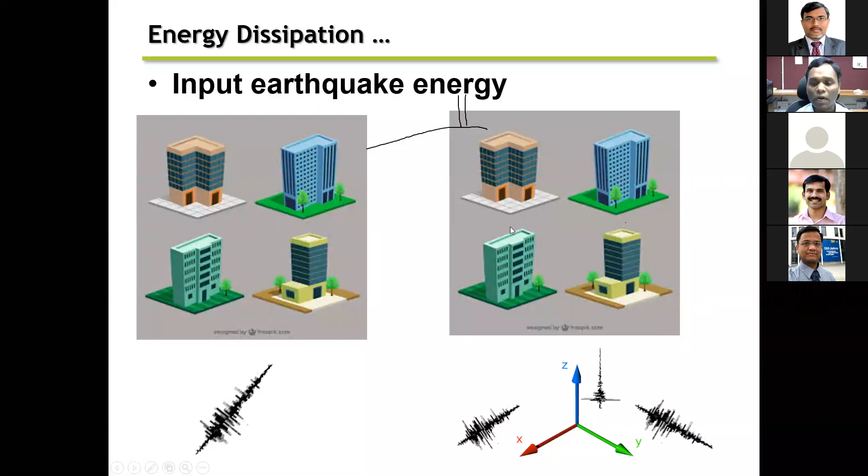Now, mostly the vertical earthquake component is smaller than the horizontal earthquake. So in many applications, the vertical earthquake effects are not considered, but there are some cases where you have to take the vertical earthquake component.

So let's say you have a building, and in one of the two orthogonal directions you have an earthquake acting at the base - let's say the X component. Again, it may be amplified or de-amplified based on site conditions. So when you have the earthquake ground accelerations, depending on the stiffness of the structure, it transmits from the base to the floor levels, or you can say the superstructure levels.

And you have your superstructures or floor levels where you have the mass - M1, M2, M3 are the masses. So at each floor level, again, these earthquake accelerations might be nearly similar to ground acceleration, might be smaller than that, but they won't be the same.

It all depends on the stiffness of the structure. Let's say at each floor level, some earthquake acceleration components act, A1, A2, A3. These accelerations times the corresponding mass create the forces, and we call these the equivalent lateral forces due to earthquakes. When these forces act at the floor levels, your structure deflects, and the deflection varies from the base to the free part, like delta 1, delta 2, delta 3.

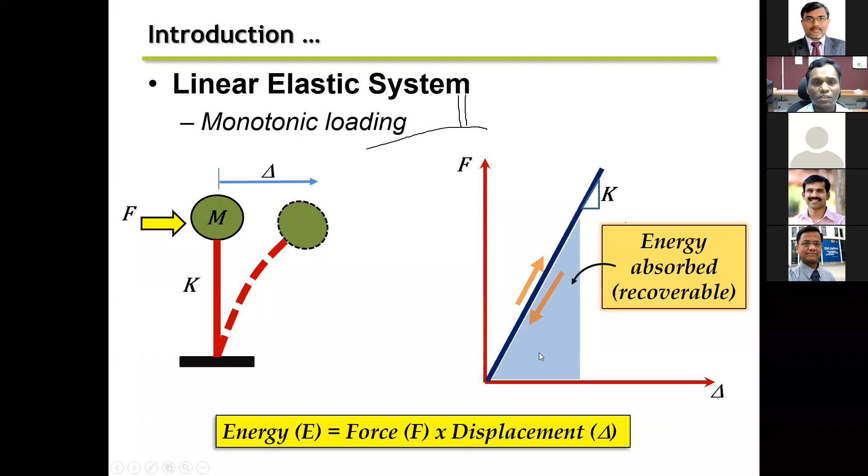Due to this force, at any force level I have a displacement, and if I take the area under this force-displacement curve, that gives me energy. But since when you release the force your displacement goes to zero, this energy is called the recoverable energy or elastic energy. Mostly you use this, it's called the strain energy, in many applications.

Now if I go to a slightly inelastic system, that means your structure is elastic up to some point, and after that you have non-linearity in the structure. If you apply monotonic loading, you'll see a linear portion in the force-displacement behavior, and after that your stiffness changes. This is called the non-linear system or the inelastic system.

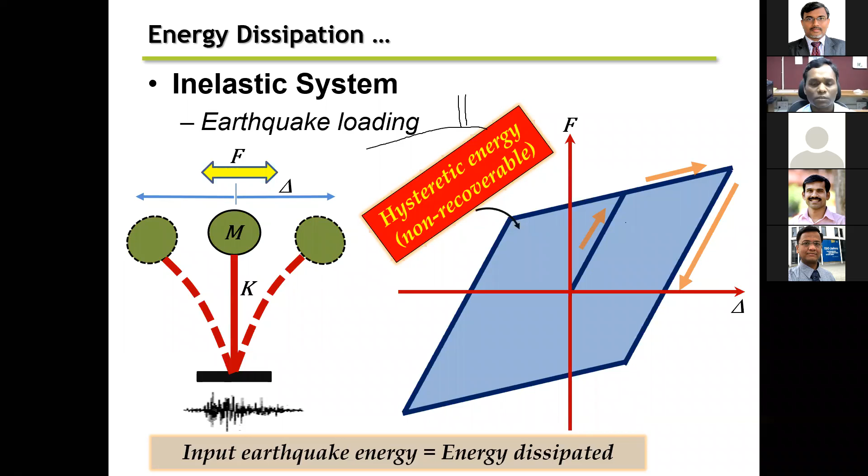So from the simple system, I'm coming to a physical or realistic structure. The simple structure is your beam. You have done many analyses on the simply supported beam. The beam can carry axial load as well as lateral load, which can be UDL, point load, or triangular loading. When the same member carries the axial component, we call it the column. In general, a member carrying axial load and bending, we call the beam column.

But if I take a simple, generalized structure or generalized beam, depending on the boundary conditions and loading, one can do the structural analysis and get the bending moment diagram and the shear force diagram. Now forget about the bending moment diagram. With the shear force, when you have this kind of force, you can calculate the shear at each level. So when you apply this force, you have some displacement.

So that means I can plot shear versus displacement. If it is a linear system, it will be similar to what I showed here, a linear behavior. If y-axis is shear and x-axis is the corresponding shear displacement, the area is also the energy. Now if I come to the bending moment, I have the bending moment at some points, and if I find the corresponding rotation, moment versus rotation, the product of moment and rotation or moment and curvature is also some form of energy.

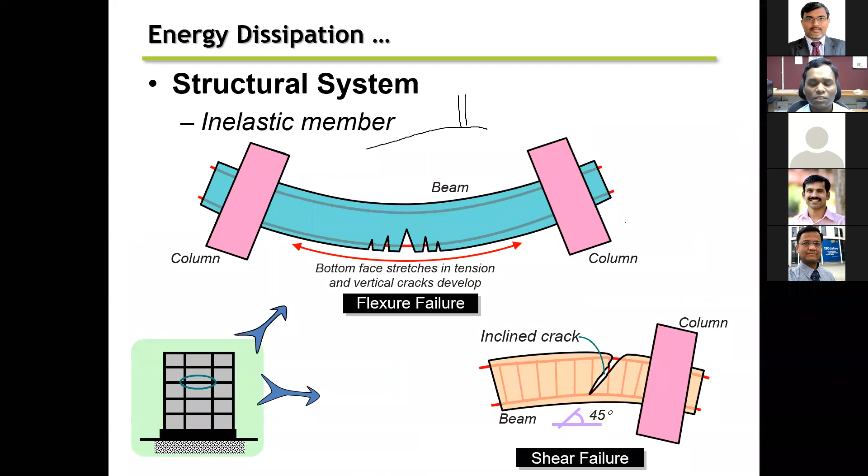So what you get is damage in the structure, whether concrete or steel. In steel, the damage we call yielding; in concrete we call it cracking. Once the structure is damaged and you still apply the load, there will be a particular section or region where the bending moment will be maximum, reaching the plastic moment capacity, and you do the plastic analysis. So if I put it in the moment-rotation curve or shear-displacement curve form, you can see a yield point, an ultimate point, and then post-ultimate degradation.

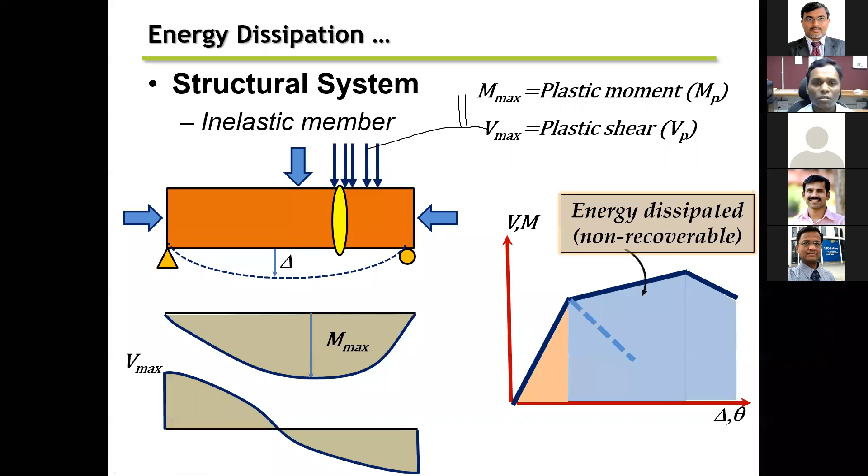So whether it is a flexure, where you have sufficient ductility beyond elastic, or it's a shear, some amount of energy is actually dissipated in an inelastic structure. So with this as the background, now let's see how we use it in earthquake design, when you go to the seismic design philosophy.

And the second point is, why should I design my structure when I know that I have a material which can go to the nonlinear range without collapse? That means you have a yield point, then it reaches the ultimate, so your ultimate strength is higher than your yield strength. After you reach the ultimate, you have a collapse or failure.

So if I know that I have this kind of strength reserve capacity, I can utilize the inelastic portion in my design. So we have a ductility, that is your maximum displacement to the yield displacement, you can define that. Then you have some overstrength, that is ultimate to yield strength.

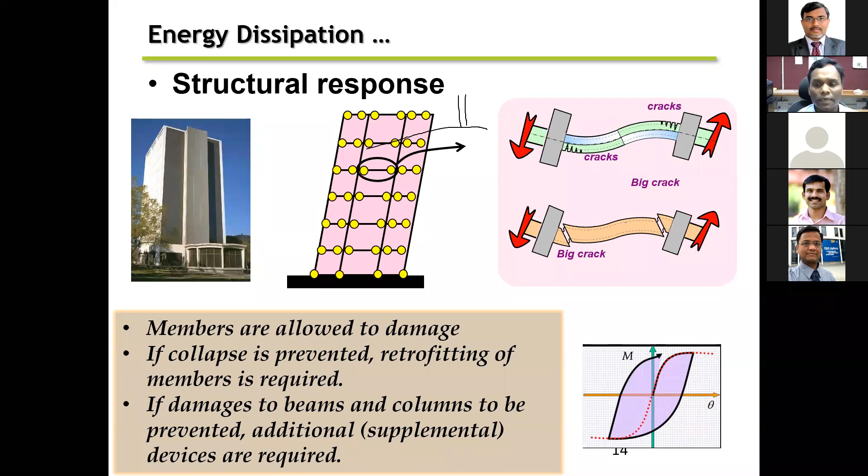It is perfectly fine standing tall. There is no stability issue. So in many cases, supplemental devices are designed to fail first. That means they should damage before your beams and columns, because the motto is you can simply remove these supplemental devices without disturbing the stability of the entire structure. That's essentially called the energy dissipation or energy balance concept. The total input energy must be dissipated in some hysteretic manner, like by damaging the beams and columns, or in the supplemental or passive devices.

Now the second term is damping. Essentially, damping is a resistance to the motion of a vibrating body. If you take a cantilever structure, or simply a rod fixed at the ground, pull it from the free end to some displacement and release it, you'll see it vibrate, and the rod will come to a zero position automatically. That means there is a degradation, a reduction in vibration over time, until the structure comes back to the original position.

So essentially there is some internal mechanism which releases mechanical energy in the structure. Many times it's through energy being converted to heat. If you take a simple steel bar and bend it up and down continuously at a fairly fast rate, you'll find that at some point a particular area heats up. Essentially, whatever force or displacement you apply, that kind of energy is being dissipated as heat energy. That's why inherently materials have some damping.

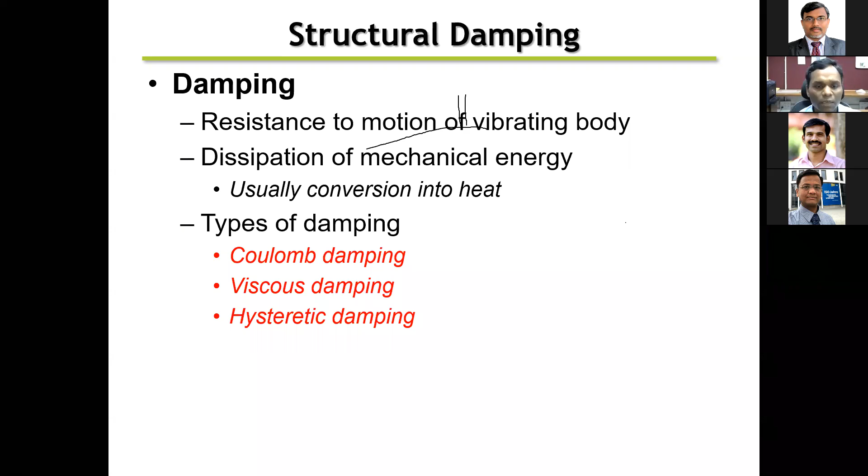Mostly this damping is modeled as Coulomb damping, viscous damping, or hysteretic damping. Most examples of this are material damping. For example, if you have aggregates and cement and you apply some force, there will be friction between the constituents, so inherently you get damping in the materials. You may also have joints with some friction, and due to that friction, it resists the force and reduces the vibrations.

You may have specific materials, like viscoelastic materials, which provide dissipation of energy - most of the time you call this loss of energy. It's also used, for example, in door seals, like automatic door closers, which have some damping that reduces displacement or vibration. You may have hydraulic-based dampers, for example in vehicle shock absorbers. So there are many dampers or damping devices possible. There's also damping due to impacts, acoustic radiation like sound, where energy is transmitted to sound, and structural radiation, the transport of vibration from one structure to another or one fluid to another. These are just some examples, not an exhaustive list, just to give an idea of what damping means.

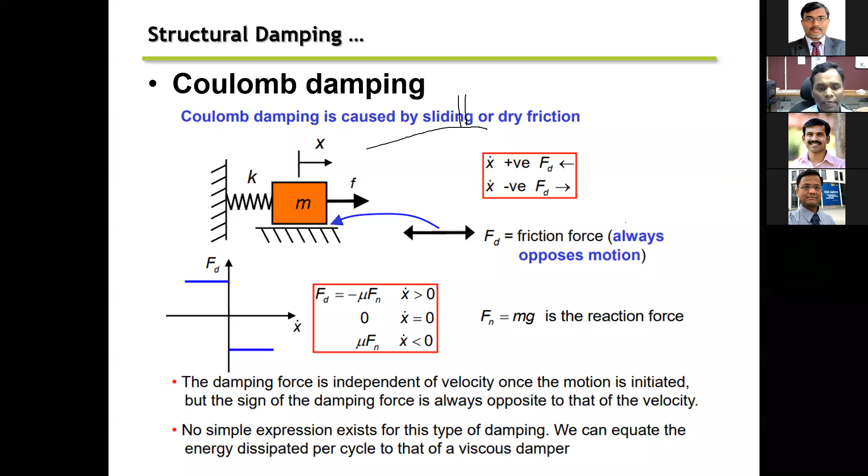Remember that this damping force is independent of velocity - it's not a static force, there's a dynamic force with some velocity involved. So it's independent of velocity, but the direction of the friction force is dependent on velocity. If your velocity is in a positive direction, your friction force will be in the negative direction. There's no simple expression to explain this damping, but it's usually expressed with respect to viscous damping. So if I have cyclic loading, let's say one cycle of loading - you take a displacement of 5mm, go back to minus 5mm, and then come back to 0.

You will see that your friction force remains the same, and then as you come to the same displacement, you're coming to negative force, and then you have a similar force in the positive direction. So it gives you 4 times of this area, or 4 times of FD into X. So if this is X and FD, the total area is 4 into mu into Fn, that is your reaction force. So that is how you calculate it.

What's interesting is that damping is also related to the energy dissipation of the system. So the Coulomb damping is essentially the friction damping.

When you go to viscous damping, it's the dissipation of energy due to liquid lubrication between the moving body. Let's say you have a bucket or a closed cylinder with some kind of viscous fluid, and then you have a piston which you are pushing or pulling. You'll see that you get some resistance, and when that body, your piston, is moving up and left to right, you get that force which is called the damping force, which essentially depends on the viscosity of the fluid and the velocity.

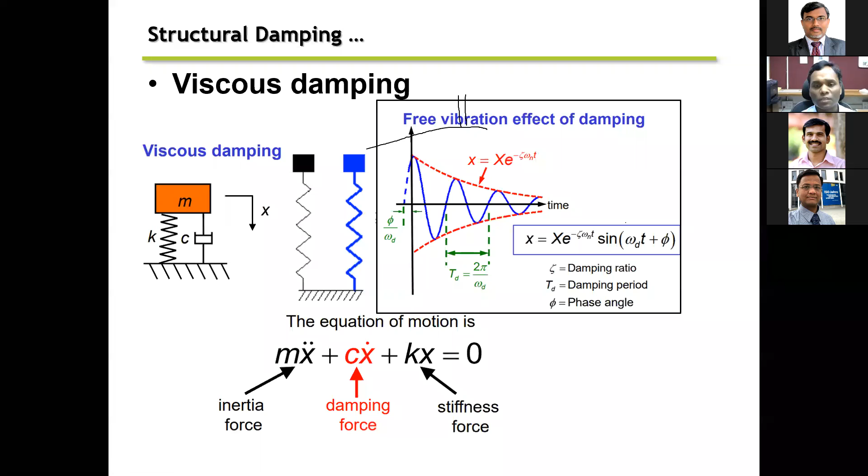So you have a damping force which comes into picture in resisting the applied forces. As I told you, the damping force in the viscous damper is nothing but your damping coefficient C times the velocity x dot.

Once you try to find out the energy, which is force with distance, you get this kind of equation. The delta E is nothing but the energy lost per cycle, this kind of equation, which up to a particular time gives you the total energy. Now this is a function of your velocity, x dot.

So if I have a motion which is, let's say, harmonic motion, I can find out my displacement as some amplitude capital X times sine of omega t plus phi. You can calculate the velocity, and if you use this velocity term and do the integration from 0 to 2 pi by omega, you get that the total energy loss in one cycle for a viscous damper under harmonic motion is pi c omega X squared.

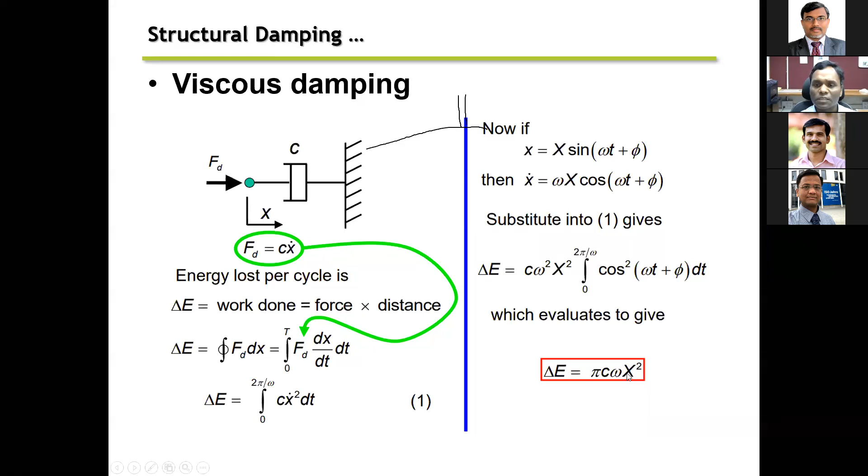Remember, X is the amplitude, the displacement amplitude. Unlike Coulomb damping, which was 4 times mu times Fn times x, this is pi c omega x squared. That's why you get the force-displacement relationship as a kind of square term, the parabolic term, right? So now the third point is the structural damping, which is called the hysteretic damping.

So these three damping behaviors are essentially used in the development of the supplemental devices, and many of the energy dissipation devices which I talk about today are based mostly on these three components.

So just to give an idea of hysteretic damping, if you have a simple mass and spring, remember this spring represents the stiffness of the structure, it is not a linear spring, it's a nonlinear spring, because you have the hysteretic behavior and you are trying to model the hysteretic damping. So in place of only K, you have K plus j K eta, where eta is the loss factor. J represents the complex stiffness in this modeling of the damping.

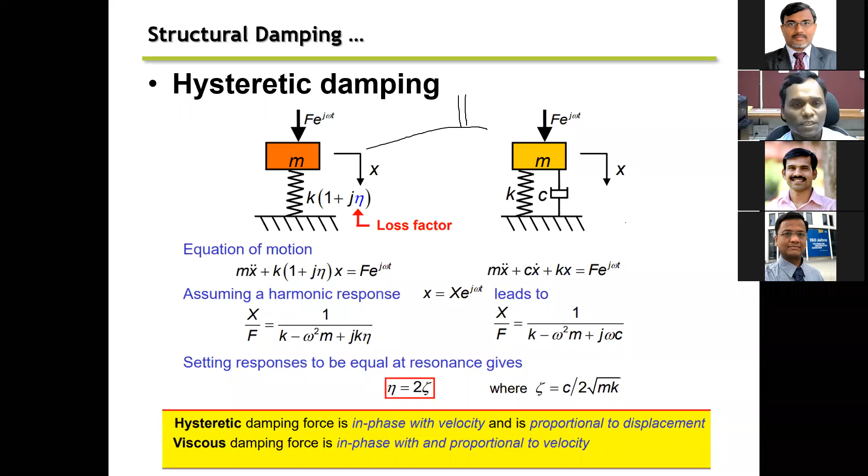Before I wind up these fundamentals, just to give an idea of what is the equivalent viscous damping forces and coefficients. So we have a viscous damping mechanism. The damping force will be damping coefficient times the velocity. So the equivalent viscous damping coefficient, or the damping coefficient, is nothing but your C.

So your hysteretic damping is a function of your stiffness, the force. That is stiffness into displacement, but it is not the elastic stiffness, it is the inelastic stiffness that comes into picture in the hysteretic response. So that's why it is eta times your K.

And when I say what is the equivalent viscous damping for the hysteretic damper, it is K eta by omega. When I come to Coulomb damping, it is nothing but your frictional force, that is your mu into your Fn. And when I come to the equivalent viscous damping, it is essentially dividing the energy dissipated by friction by the energy dissipated by the equivalent viscous damper. So it's essentially 4 mu Fn x divided by pi omega x square. So x is cancelled, and this term represents the equivalent viscous damping for the Coulomb damping mechanism.

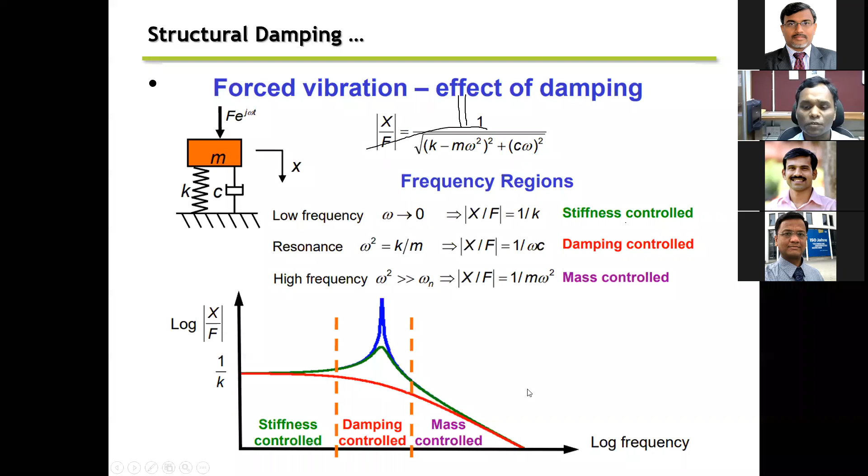If I see the typical materials, which material has more damping is related to eta, the loss factor. For steel, the loss factor for the material is essentially from 0.0002 to close to 0.001. If you see concrete, it is in this range, meaning the loss factor in concrete is higher than steel, iron, or brass.

Aluminum has a low loss factor, whereas among metals, lead has a high loss factor. That's why aluminum, steel, and lead are mostly used in development of these devices.

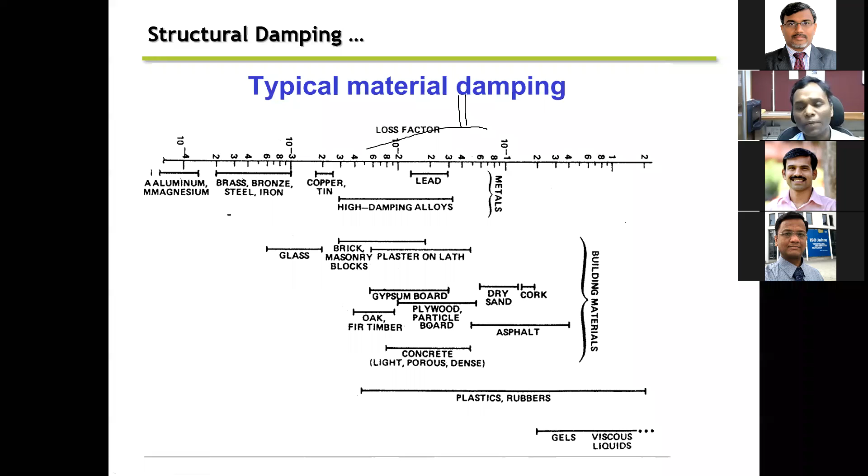If you see in terms of absolute value, gels like plastic or viscous liquid have high loss. So taking either metal, concrete material, building materials, bricks, or fluid, these are used in development of different damping devices.

So now the next term is structural control. With this background, how can we use this knowledge to develop a mechanism so that we can prevent the collapse of the structure? We can control the acceleration response, velocity response, or displacement response.

Mostly the energy dissipation techniques used to control vibration of a structure are broadly divided into three parts: passive control, active control, and semi-active control. I'll go through these three very briefly, but my main focus today will be on passive control, which is one of the most effective and cost-efficient techniques.

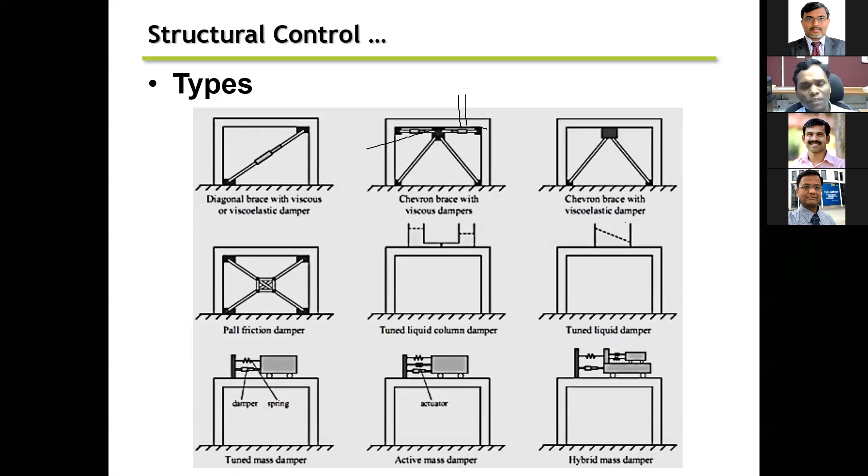Now, to put it into perspective, let's see how they behave differently. The first thing is passive energy dissipation. If you see the fundamental case: you have a structure, you apply some excitation, you get some response. Now if with this structure I add a device such that when the structure moves, this device also moves, but placed so that they actually pull back the structure to some extent, that is the concept of passive devices.

For example, you have a beam column frame, you apply a steel tube and connect it to the beam column joints, then apply lateral force. When the tube was not there versus with the tube, you'll see the structure with the tube provides more resistance. This tube becomes effective or resists force only when you apply some lateral forces, so that's why this is called passive, meaning it does not require any additional power to activate it.

The moment you have some kind of response, it's automatically activated and tries to bring back the structure, making it smaller to reduce the response of the structure. That's why it is called passive devices.

Active control is mostly a regulated format. So you have a structure, you apply the excitation, and the structure will give you some kind of response. What you do is collect that response of the structure, maybe the displacement, velocity, or acceleration. You attach some kind of displacement sensor and it will record the displacement. You attach accelerometers and it will record the acceleration of the structure due to the earthquake or any kind of excitation. So you take the readings or data from the sensors and send them to the controller.

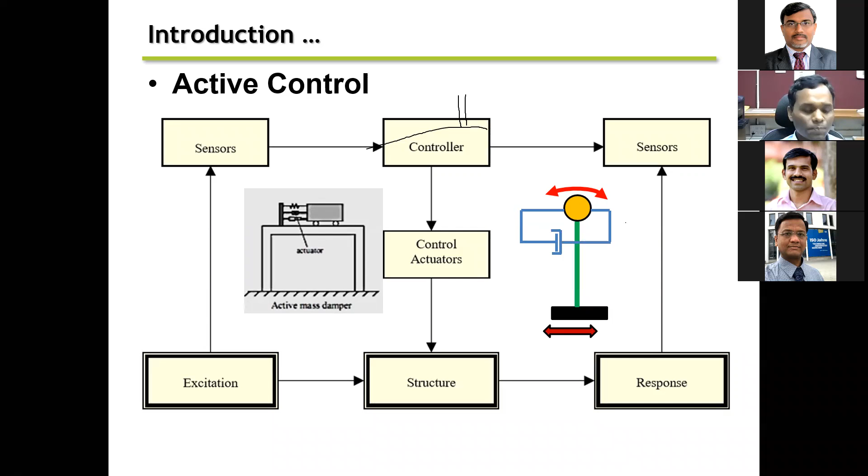So that is called your active system. Obviously this active system is more effective, but essentially it requires power. Without power it cannot work. So this is also used in structures.

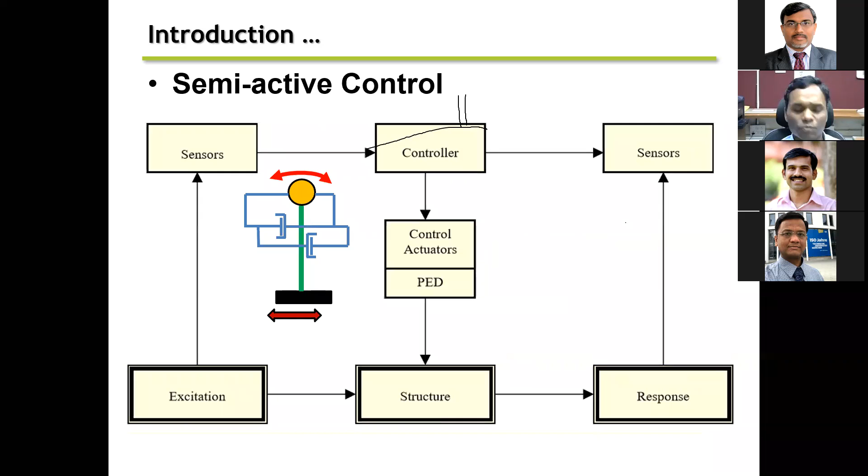Semi-active system is essentially mostly a combination of the hybrid active system and passive systems. The only thing here is you have a control actuator which tells the passive devices how much force to apply, so that's why it's a semi-active control system. Hybrid system is a combination of active and passive. The difference between semi-active and hybrid is that one part is controlled by the passive, and another part is controlled by this kind of active system.

So this is some kind of diagram to show how they actually behave when excitation is applied. As I said, the focus here is mostly on how passive energy dissipation devices are developed and how they work. The passive devices don't need any kind of power system to activate when there is excitation. The idea is it should give you energy dissipation and it should give you damping.

So if I consider that my input energy, let's say EI is the input energy coming from the earthquake at the base of the structure, that is the demand coming into the structure. The member has strain energy which is recoverable, that's ES. You have kinetic energy of the structure, that's EK. Then you have some inherent damping due to the material. Let's forget about DI and DA right now. This part comes from the damping, and this part comes from your hysteretic energy.

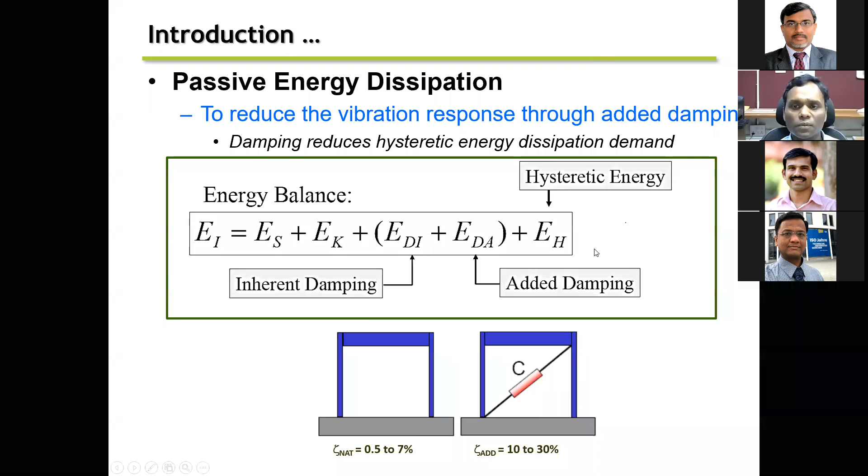Not necessarily that all damping devices use the viscous damper, which is easier to understand and visualize. You may have damping based on Coulomb damping, that is friction based, or you may have hysteretic damping, due to the yielding of the members.

So that energy which is released due to friction or due to hysteresis, we can always find out the equivalent damping coefficient with respect to the viscous damping.

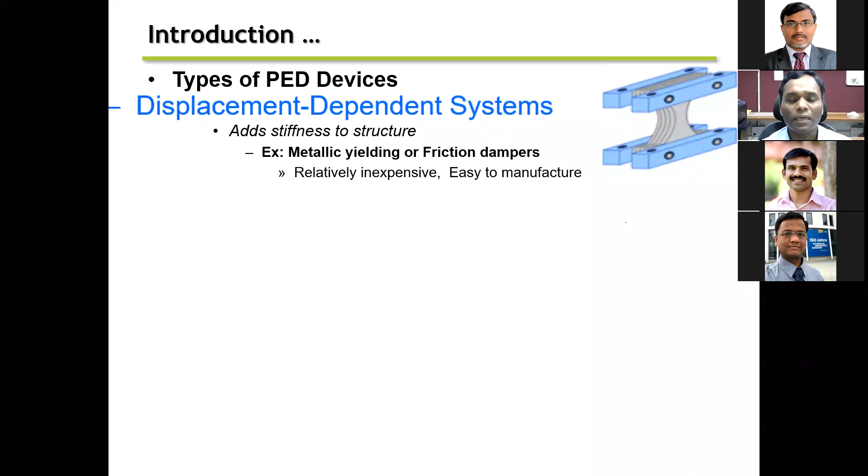So from a dynamics point of view, earthquake engineering or structural dynamics, we know we have SA and T, and SA by T is essentially your response spectrum. We know there's a relation between T, SD, and SA. So what we can plot is SA by SD, that is spectral acceleration versus spectral displacement.

Okay, now you add the displacement device. So what it actually does is sometimes increase the stiffness, but that stiffness increase depends on how we install it. Most of the cases, the stiffness increase is not that significant.

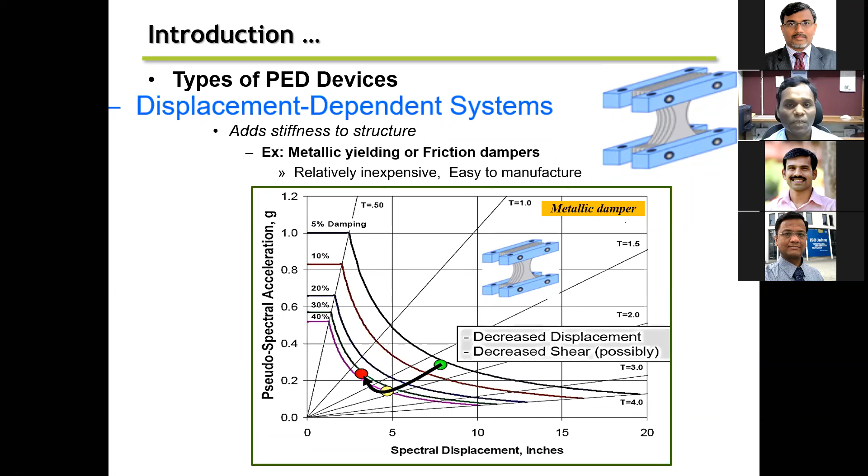Now the second point is velocity-based systems, meaning your damping is based on velocity. The best example is the viscous damper. It may or may not add stiffness to the system. So in similar fashion, for the same time period, once you have additional damping, you come to this position.

So whether you use the velocity-dependent system or the displacement-dependent system, your shear force demand on the structure is reduced, your displacement response is reduced, and in some cases, like in your viscous damper, your velocity is also reduced.

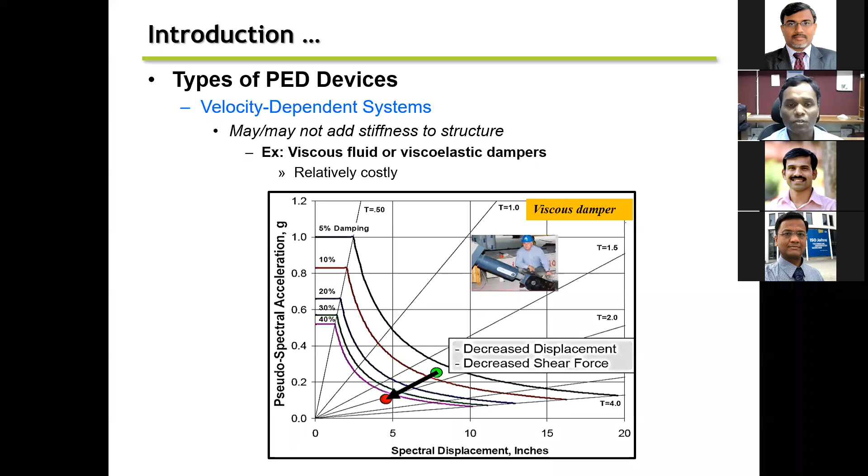So there are some additional systems, some of which I will discuss today. One is the recentering devices, like vibration absorbers, the tuned mass dampers, which I'm not going to explain today. Seismic isolation is again part of your passive energy dissipation. I will discuss briefly about seismic isolation in this lecture. So the first part of the passive energy dissipation devices is seismic isolation.

The base isolation, right? So the basic difference between this system and other passive energy dissipation systems is, in many cases, when you install passive devices, they may not increase the time period that much. In many cases they make the structure stiffer. In case of passive base isolation or seismic isolation, you use a very flexible layer or flexible system.

So you can think of it like a chain, and in the middle, let's say you have a rubber band. If you apply the force, your rubber band will expand, right? So what you can identify right now is, for example, you hang a steel rod from the roof and you hang a chain, maybe steel chain or something, from the roof.

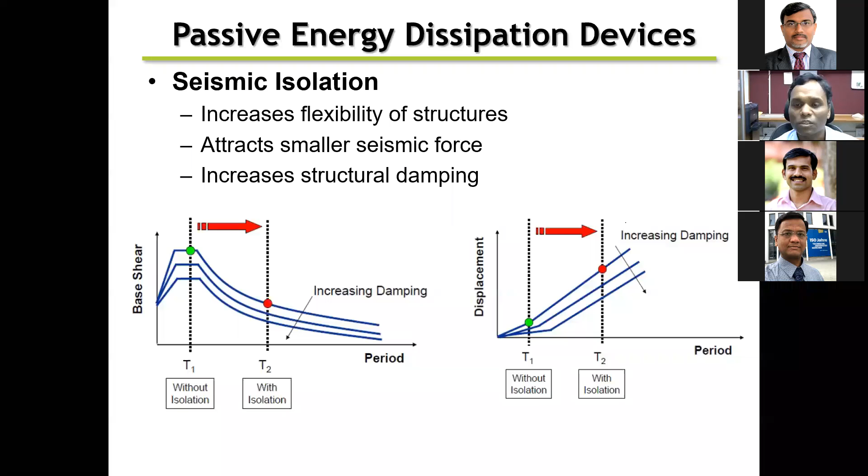Let's say, or some kind of fluid-based material one can use -- it increases the damping. Once the damping is increased, the forces are further reduced. So the idea is it increases the flexibility of the structure, it attracts smaller seismic force, and it increases the structural damping. As a result, your main primary structure is not subjected to that much displacement. These are some of the examples I'm trying to show.

So that is essentially what I was explaining. If I see the design terms, this was my initial design spectra, and due to the damping, I have the reduction in the forces.

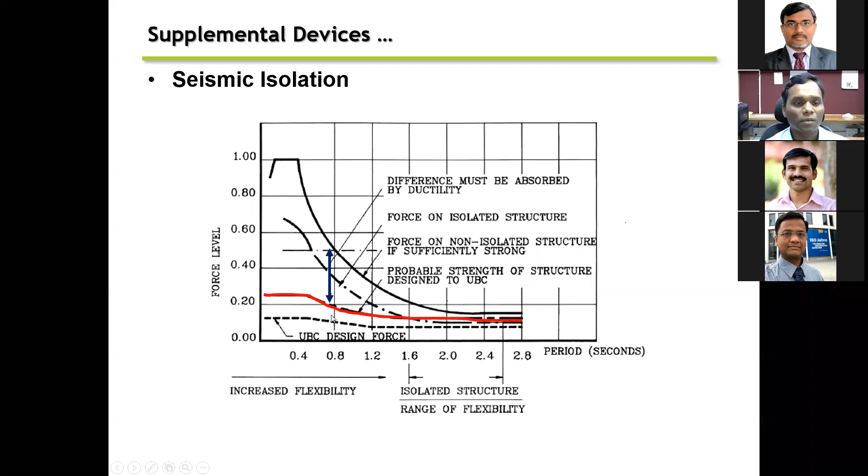So there are a lot of variety of isolators, like laminated rubber bearing or sliding bearings. I'll just briefly go through these. In laminated rubber bearing, they are based on natural rubber or the lead plug rubber bearing. Sliding is rigid sliding or elastic sliding. Then you may use the high damping rubber bearing. Remember, rubber is the material I showed you that has the highest energy loss factor.

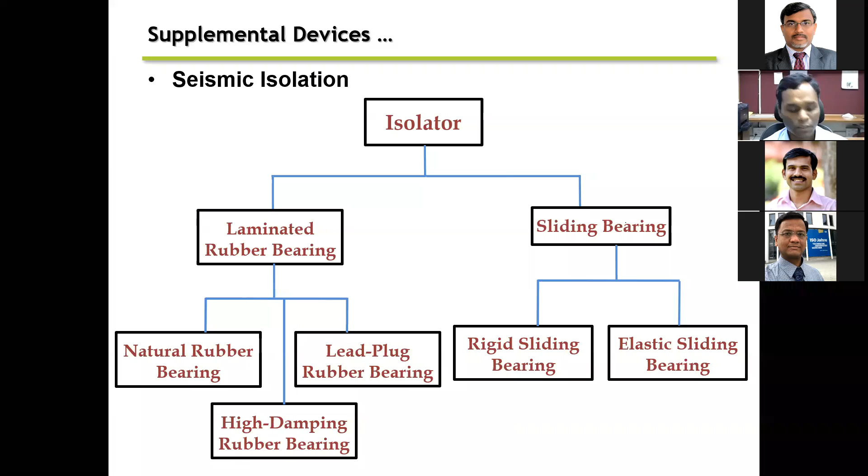So for natural rubber, you use some layers of rubber, and in between you use steel plates to increase the stiffness. If you try to model this as a simple single degree of freedom system, stiffness and damping come from rubber, and you get this kind of energy dissipation. The area under this curve is essentially energy, and it also provides the damping.

Once you go to the second part of your laminated rubber bearing, the difference between the first one and the second is that you use a lead core here. Lead core, if you see material-wise, has a better damping coefficient, the loss factor, so it helps in damping. Also, because lead is very, very stiff, it also increases the stiffness. So this is another isolator.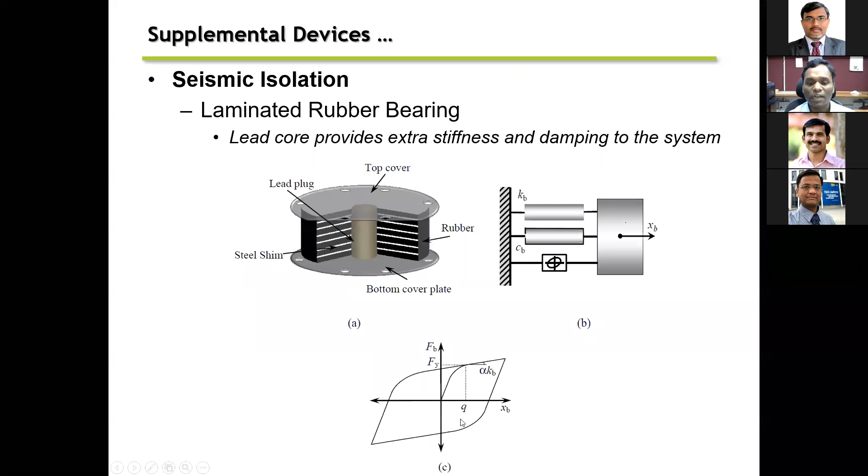The third is the sliding isolator. It is based on the mechanism of sliding friction, that is Coulomb damping. That means there are two materials, and they actually slide one over the other. So once you get the friction, your energy dissipation or the force displacement relationship is a kind of rectangle, unlike here where you have some kind of butterfly shape.

Then you have the friction pendulum. It is similar to the sliding type isolator. The only difference is you make a concave shape in such a way that when your isolator is excited, it will initially be at this position. When there is some excitation, it will take this path and come to this position, but because of the stability, it has to come back to the origin position. So inherently, it will come back to its own position, providing the recentering capability of the structure. So this is also called one type of isolator.

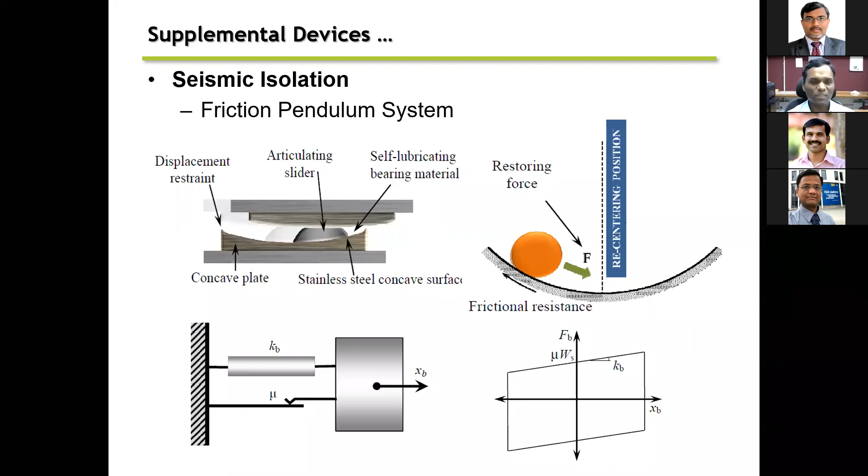So those are essentially the seismic isolation devices used. The second part of the damping device I'm talking about is the friction damper. We have already discussed how energy is dissipated when you have viscosity or friction. So essentially, it's about putting plates and allowing them to slide against each other. That is essentially the concept of the friction damper.

So if you see this building, between these diagonals there is, let's say, a brace. It's a brace here, and there's another brace here, and in between there are plates which you can see, connected with bolts. So when it goes in the positive direction, it will slide. When it goes in the negative direction, it will also slide. During this sliding, you get this kind of hysteretic response.

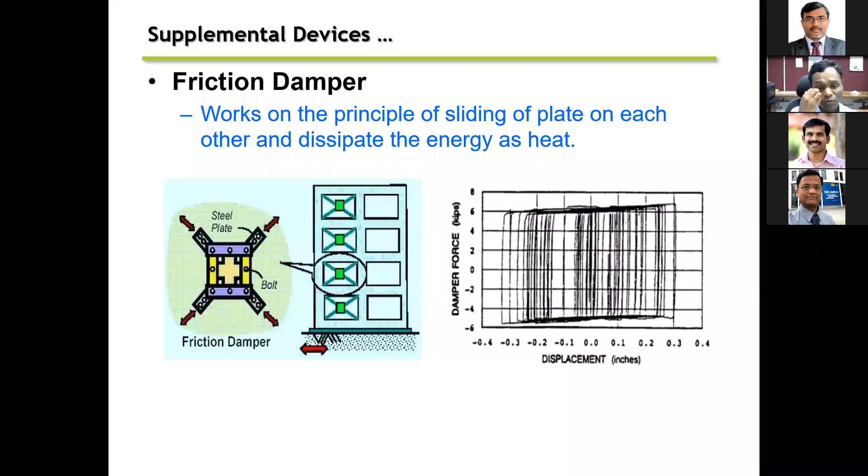At another point, there is a single brace at the end. People use the slotted type of this, meaning you have some slotting where you allow the plate to move through the slot. It provides a kind of friction and gives you energy. So the ideal friction system gives you maximum energy, however this system has very, very limited recentering capability. That means once it slides and the earthquake disappears, you will probably be left at this position, so you have to pull back the system to its zero position.

Now the third point is your viscous damper. It's simple: you have a cylinder where a piston is allowed to move through viscous liquid or viscous fluid, and due to that you get the damping force. There are so many types of viscous dampers used.

Sometimes the piston is moved and the area between the piston and the surface of the cylinder allows the fluid to pass. Sometimes there is a small hole left where the fluid is allowed to pass through. In either case you get this kind of response. If it is only a viscous damper, the shape is more or less similar to the friction damper, though relatively elliptical, which means it does not have the recentering potential.

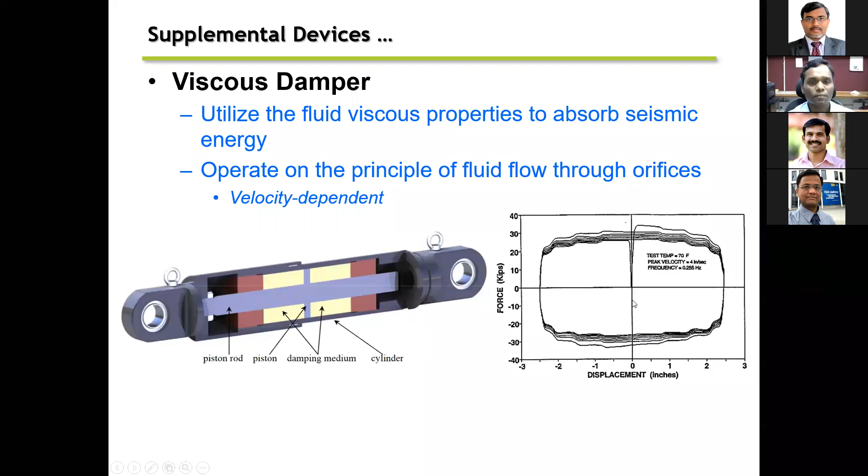One of the most advanced is called the viscoelastic damper. Viscoelastic means you have a viscosity base, and at the same time you add something to provide the stiffness. In that case this loop will be oriented like this in the diagram. Just to give more clarity, here's the cross section: the chamber, then the piston, and the chamber is filled with fluid, and depending on the velocity of the piston's movement, you get the damping forces.

So these are essentially the dampers: either the seismic isolations, the viscous dampers, or the friction dampers. All these three systems can probably be reused in subsequent applications, except when they reach their ultimate limits. But we sometimes use another technique called sacrificial elements.

A sacrificial element is like, in your building or apartment, the electrical connections between the main source and your electrical appliances, where we use a system called the fuse. If the load is very, very high, the fuse will burn away. That will not damage the appliances; it provides a kind of circuit breaker so that it will not damage your appliances. So that is called the fuse.

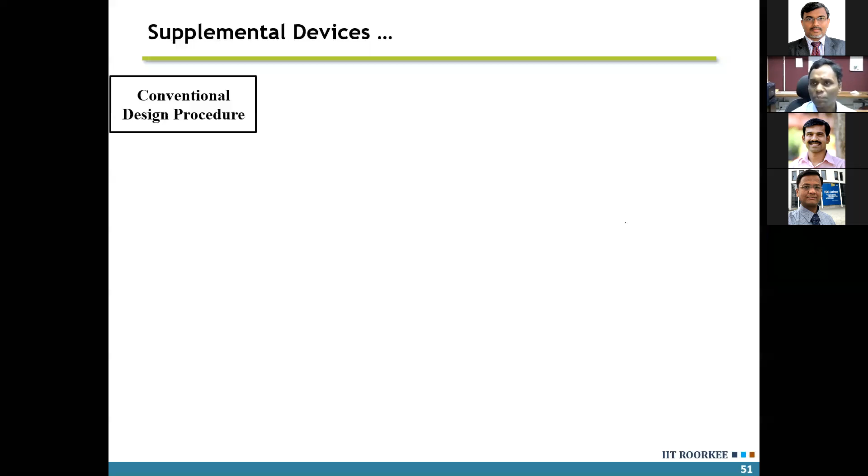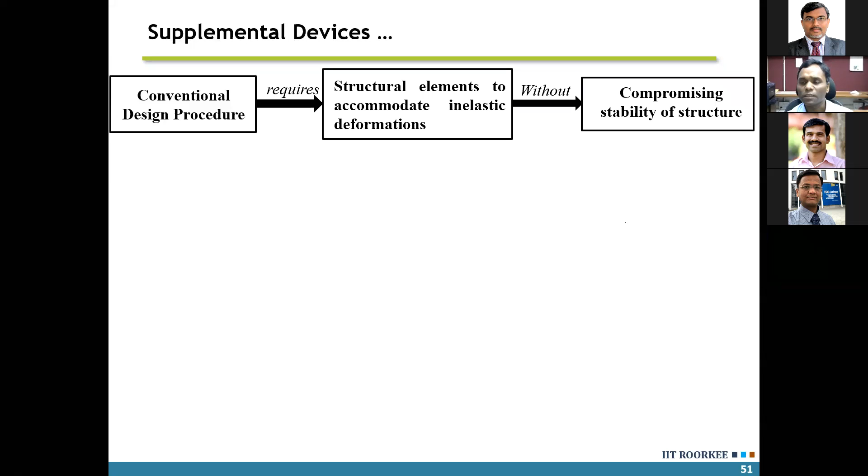Just to give you the reason why we do this: in our conventional seismic design procedure, we accept that our structural elements go to inelastic deformations, but without compromising stability. But in many cases that doesn't happen, so you have permanent deformations as already discussed. To control this, or control the demolishing and repair cost, or prevent the demolishing of entire structures, you need a simpler and more cost-effective, much cheaper system.

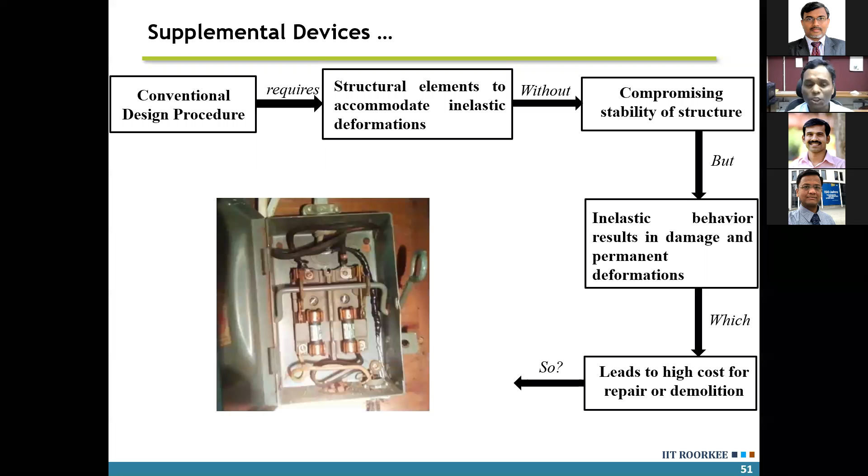So one of the best uses of the hysteretic damper is through yielding of the metals - metal in the sense it can be steel, aluminum, or copper.

So when I say yielding, let me broadly explain how we can utilize metal to create energy dissipation potential. You take the same steel plate, put it in the UTM, and pull it, applying tensile forces. When you apply tensile force, you'll see it behaves linearly, then reaches a yield point, ultimate point, and fracture. We call that yielding due to axial force, that is axial yielding.

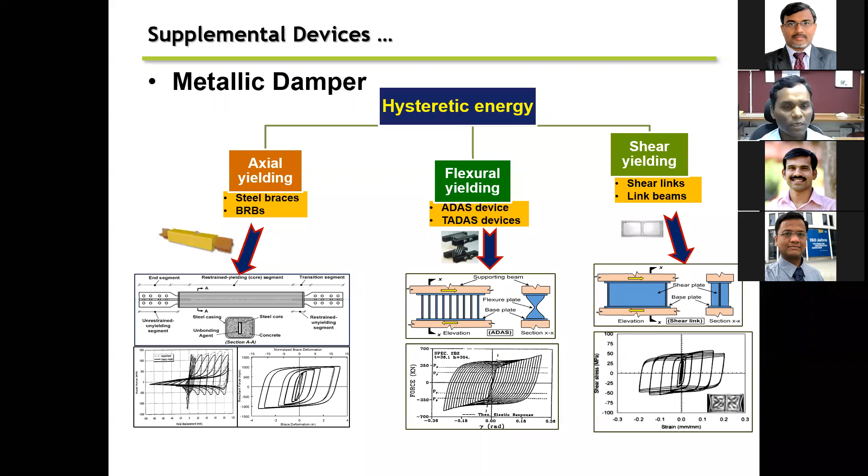I will quickly go through these systems. One of the cheapest systems used in structural application is the steel brace - the concentric steel brace. Concentric means it's simple, it can be a circular hollow tube or an I-section connected from joint to joint diagonally, so the force is concentric at the joints. It can also be used in a double shape, inverted V or V shape, connected at one point.

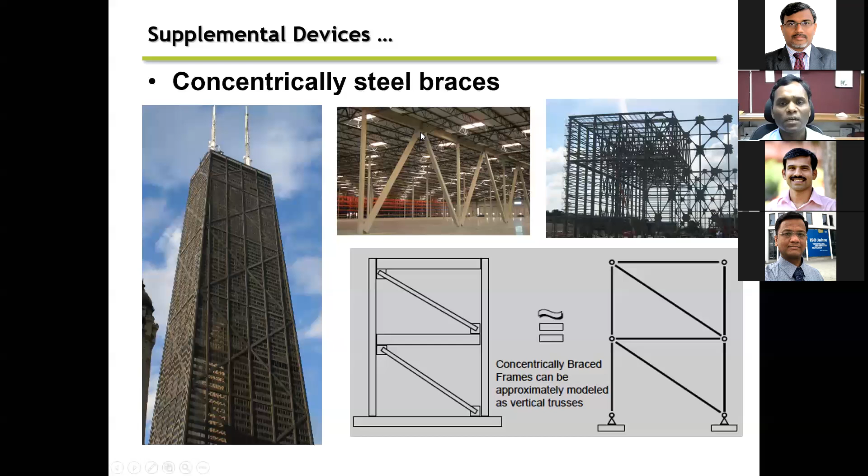The main problem with this, even though it's one of the cheapest systems, is that if you apply tension force, you get yielding, but once you apply compressive force, the steel will buckle - and that's exactly what happens here. In tension you see yielding, but in compression you reach the buckling strength, and once the member buckles, the strength is reduced. This happens in real steel braces.

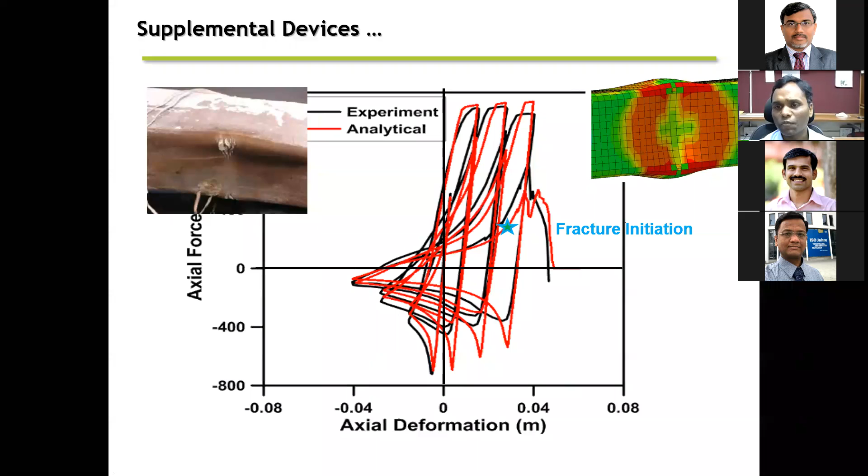Initially it goes to global buckling, then reduction in buckling strength, then you may get local buckling, then fracture, then complete fracture. Remember, these are sacrificial elements - even if they damage completely, the structure's stability is not affected. The more the damage and inelastic deformation, the higher the energy dissipation.

One way to use it is a steel brace connected with a gusset plate. You cannot weld this plate directly - it's possible to weld the brace to beams and columns, but the most common technique is to use a gusset plate here, allowing buckling of the plate or brace either in-plane or out-of-plane.

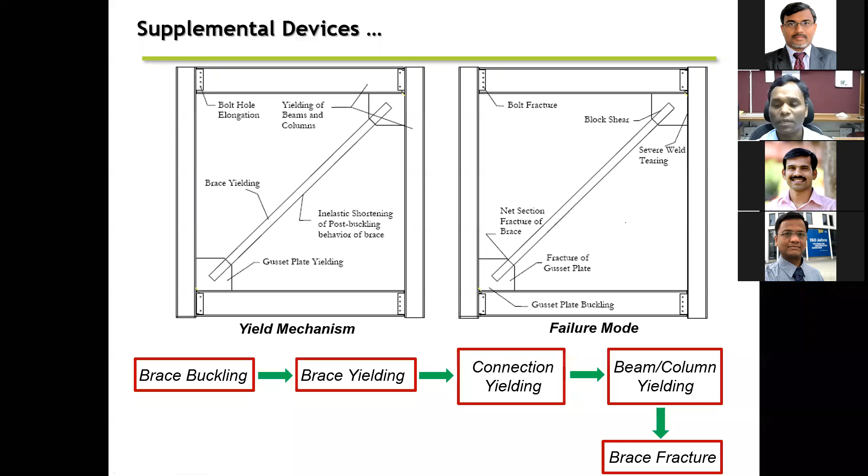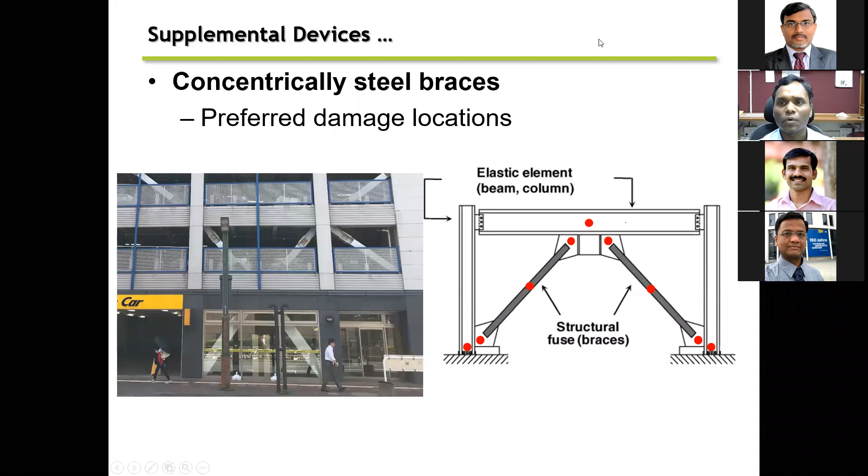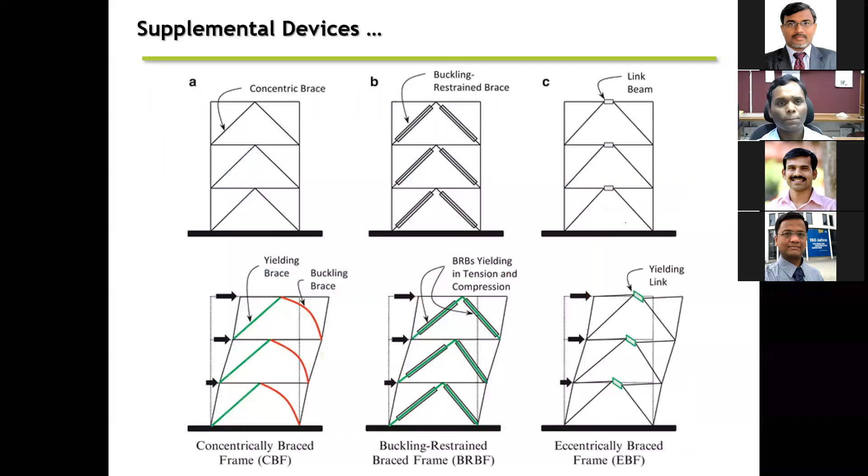Another option, the advanced one, is the buckling restrained braces. Since conventional braces essentially suffer from buckling, the buckling restrained braces are systems where you have tension yielding and compression yielding. That means you hold the plate in a sandwich tube, or some concrete, so that you get the energy dissipation on both sides. This is the energy dissipation by conventional brace, whereas for the buckling restrained BRB, you can see symmetrical energy behavior.

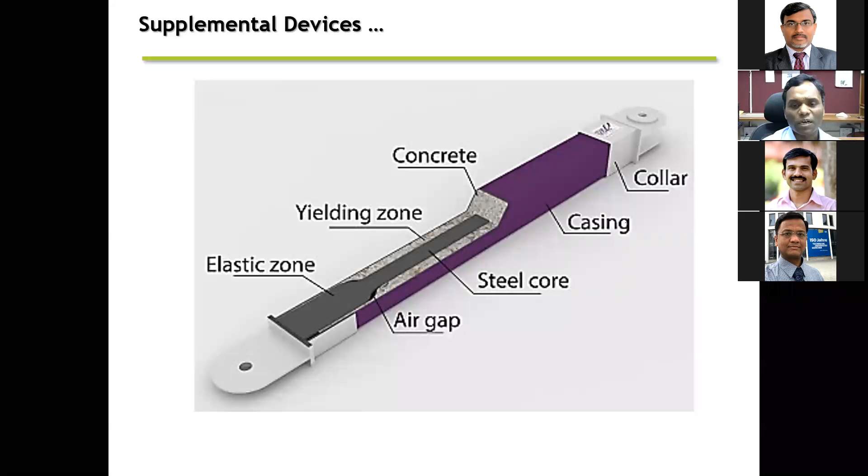I'll skip this for now due to time. Typically the buckling restrained brace is a steel tube and steel plate, unbonded, in the steel tube filled with concrete, but there is no connection between the plate and the concrete.

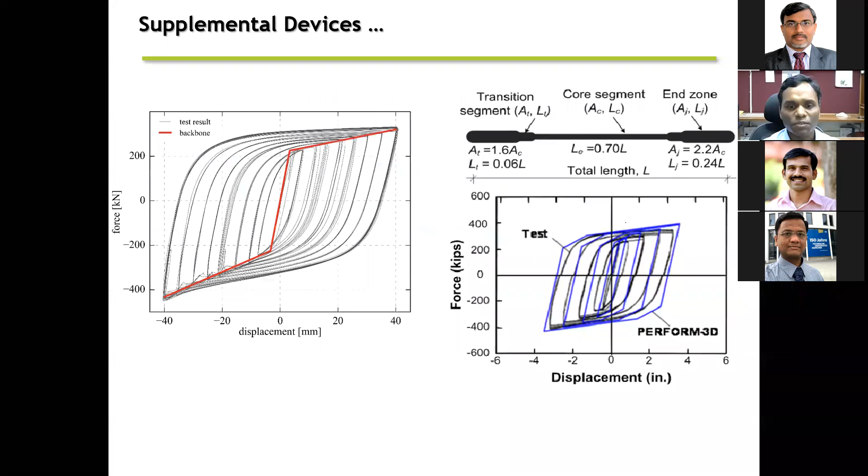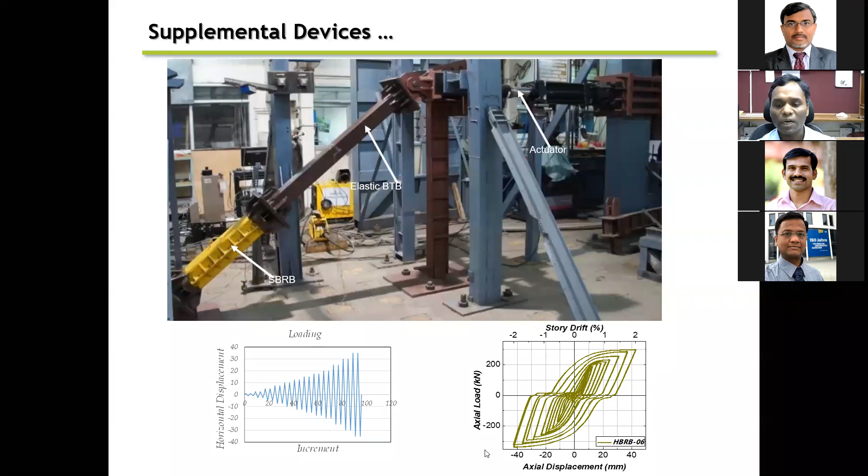There are several types of buckling restrained braces developed. One advanced type, instead of using the entire buckling restrained brace which would be much heavier because of the concrete, combines it with the conventional brace and the buckling restrained brace. This is called the short core BRB. This is what it looks like. In some tests we've done, this part is only the BRB, and this is the part with the steel tubes, and you can see the energy dissipation. You have no buckling at compression, and more or less similar tension and compression behavior.

Another one is the lightweight BRB, where the concrete is replaced so everything is steel. The point here is this can be fabricated at the site, whereas in general BRBs are fabricated in the factory. But all-steel BRBs can be taken to the site and fabricated directly there. It's much lighter than conventional BRBs.

Some tests we've done have also shown very good energy dissipation results. If you look at the problem with energy dissipation devices, it's not really a problem, more a disadvantage: they provide excellent energy dissipation and prevent your structure from collapse, but the problem is sometimes they don't have recentering. That means if the earthquake is gone, your building will be left in a tilted position.

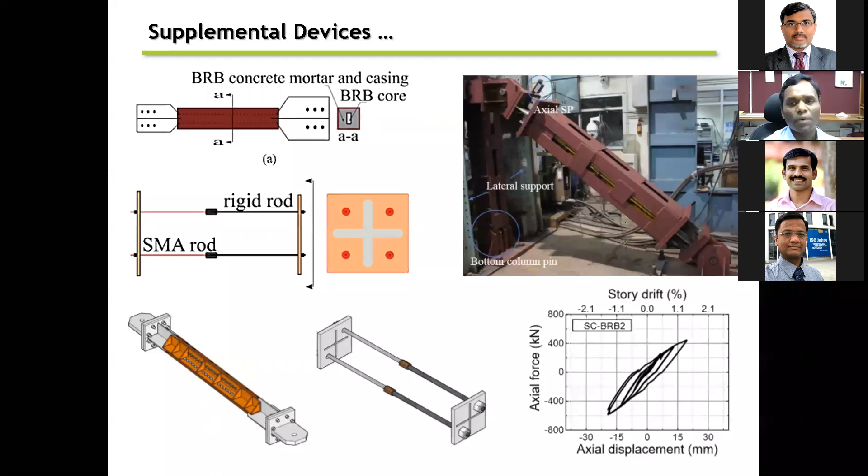So this is some advanced BRB where shape memory alloy is used to bring the system back to its original position. That means you get the energy dissipation, and at the same time, at the end of the day, you get the recentering potential. For more details, you can go to my website and find some more literature.

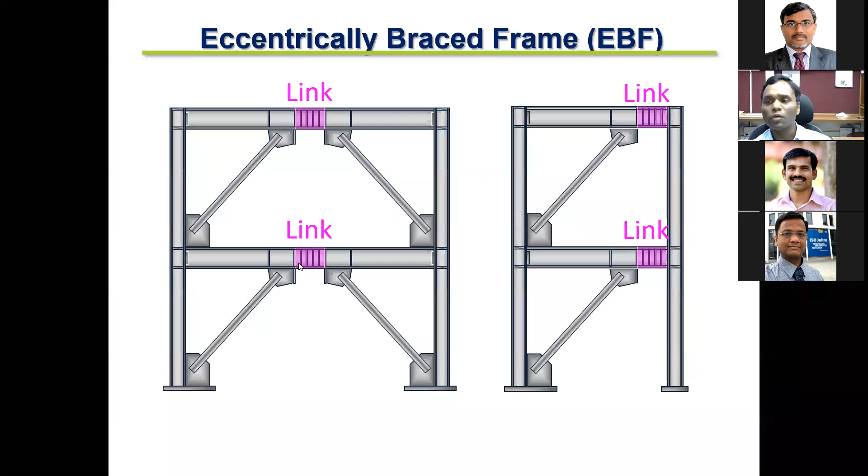The third part is the eccentrically braced frames. Eccentrically brace frame means essentially those braces are not connected at a point; you leave some kind of link here, and this part is going to take the damage in the earthquake. This is the moment resisting frame, this is the CBF, and this is the EBF, the eccentrical brace frame. Here you see this is the portion which only goes into inelastic deformations.

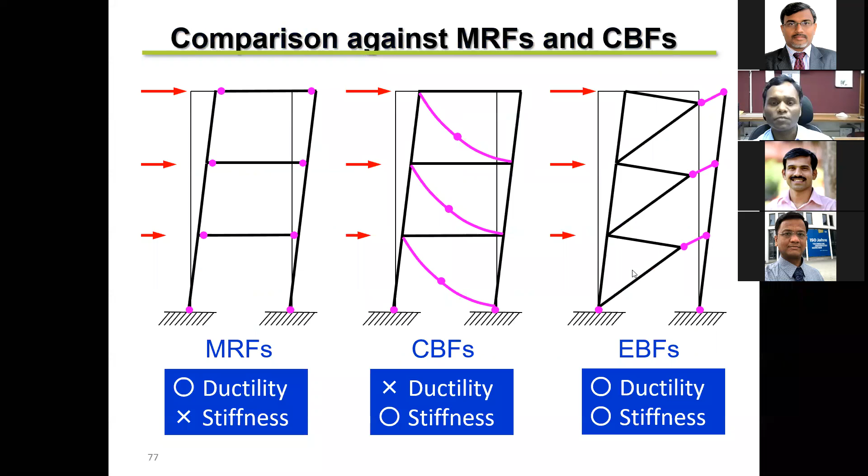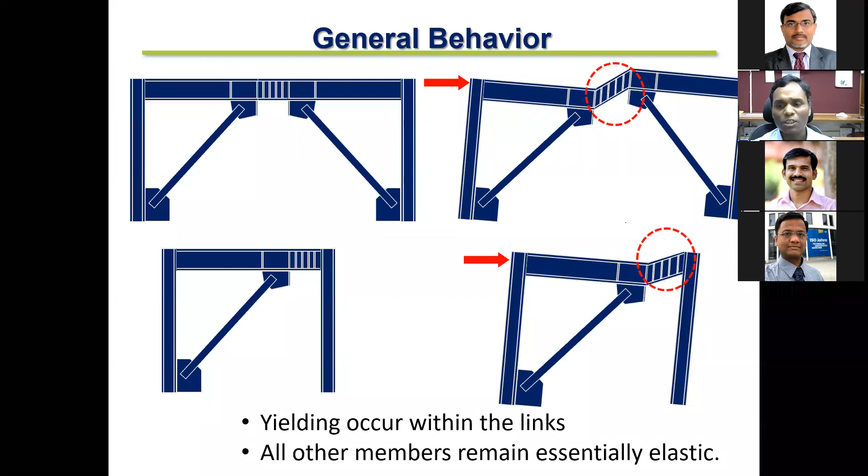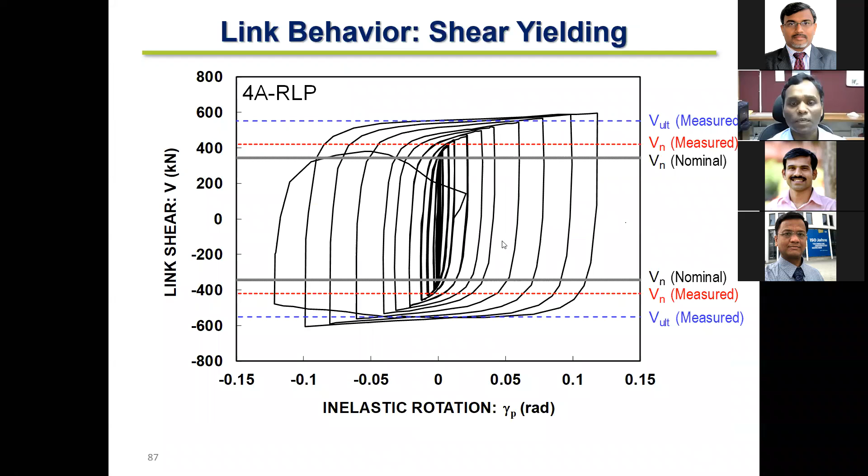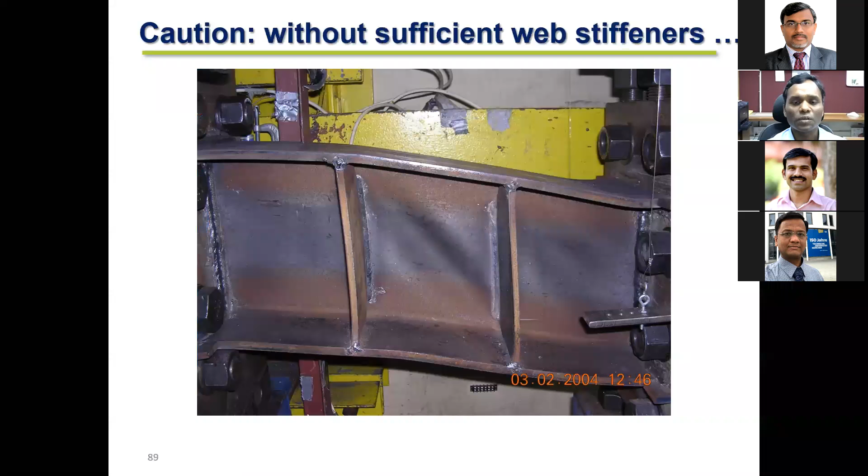Based on the architectural requirement and the space you have, the EBFs can be designed as shorter link, which will yield in shear, or the longer link, which yields in flexure, or maybe they can be designed as intermediate link, between the shear link and the flexure link.

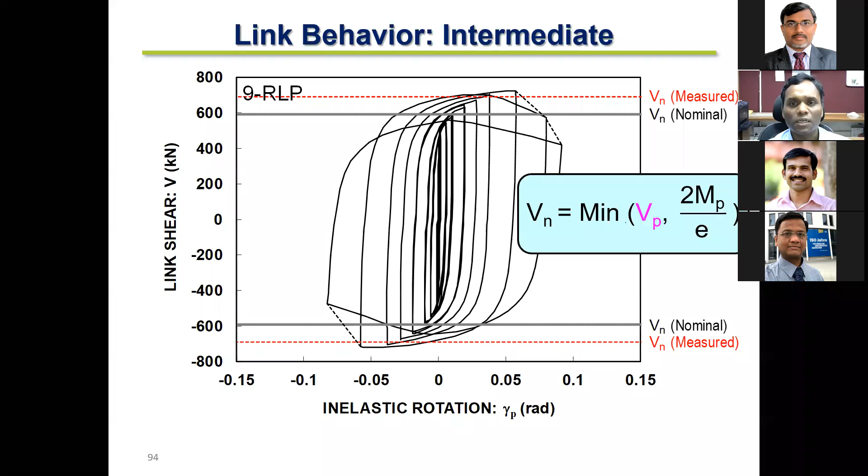Of course you have to detail it properly. You have to prevent early buckling by providing stiffeners.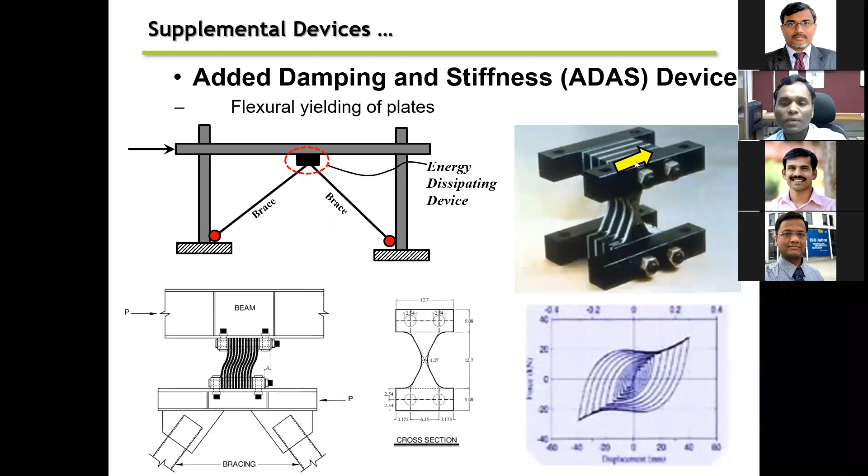Then you get hysteretic loops like this. They can be X-shaped or triangular shaped. This is one example where the ADAS has been used, and they have shown better energy dissipation. The second type is the simple shear link.

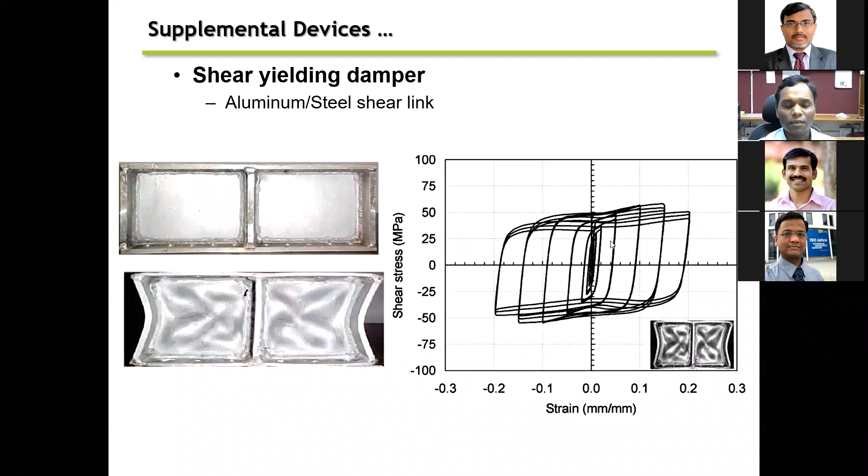That means you design it so that only the web plate is going to yield. It can be aluminum shear link or steel shear link. You can see how the energy loops are very stable and very close to a rectangle. That is called the shear link.

The third type combines shear yielding and flexure yielding. It's called SAFYD, where you have steel plates similar to the ADAS device, plus a shear plate. In the ADAS device, since it's flexure yielding, the capacity is very small, so you have to use a series of plates.

Whereas shear yielding provides higher force but reduced ductility. So this device, SAFYD, provides higher force along with better ductility. This is one loop I'm showing from a tested specimen, which shows some examples of how SAFYD actually behaves.

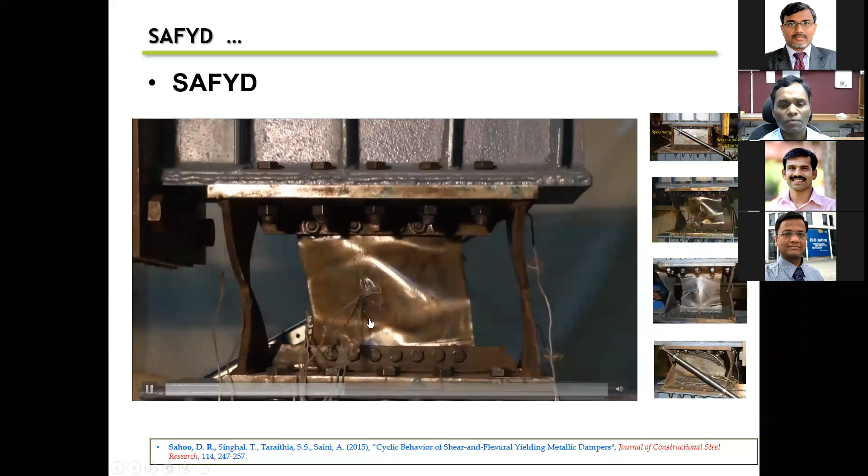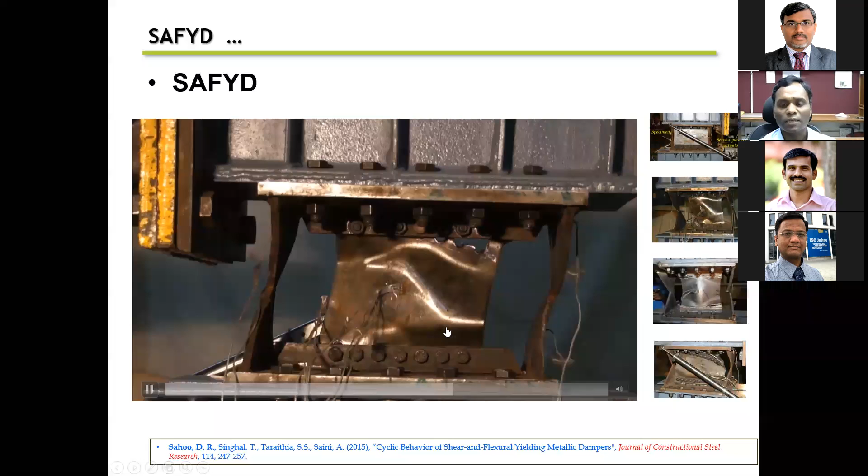These plates are the flexure plates, this is the shear plate, and at the end you get tearing of the plates, which provides more energy dissipation. At the end of the day, you have to replace this and use a new link.

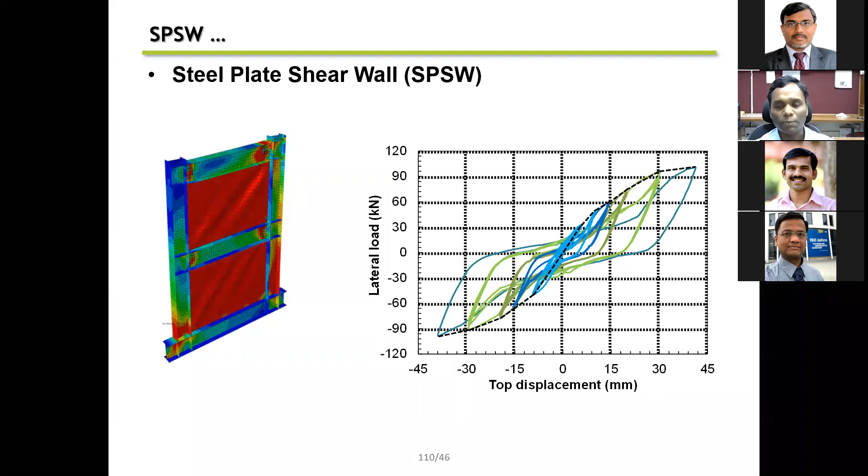The next is the steel plate shear wall. It's a thin plate used in place of a concrete shear wall. The steel plate will buckle immediately, but once it's buckled, it will provide tension field action.

That means the plate will be stressed along these diagonals. You can see it buckling here, and you can see the buckled shapes. Once it's buckled, you can see these diagonals are extended, so it's not that buckling causes strength loss. You can see the loops here widening.

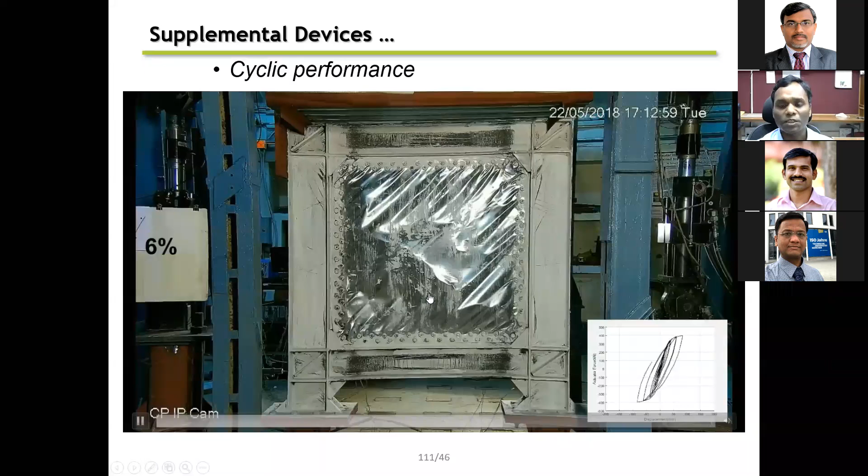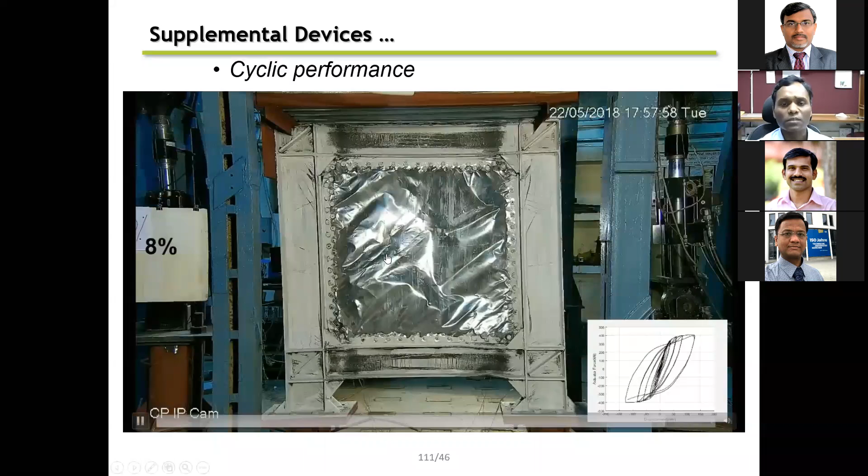It provides significant energy dissipation and has been used in many post-earthquake applications in New Zealand and other countries. This is called the tension field. Since it's a sacrificial element, you have to remove this plate and place a new plate without changing the entire system.

To summarize, these devices are very effective in controlling seismic response, lightweight, and easy to fabricate. They can be custom made based on the requirements, and the shapes can be varied based on architectural requirements.

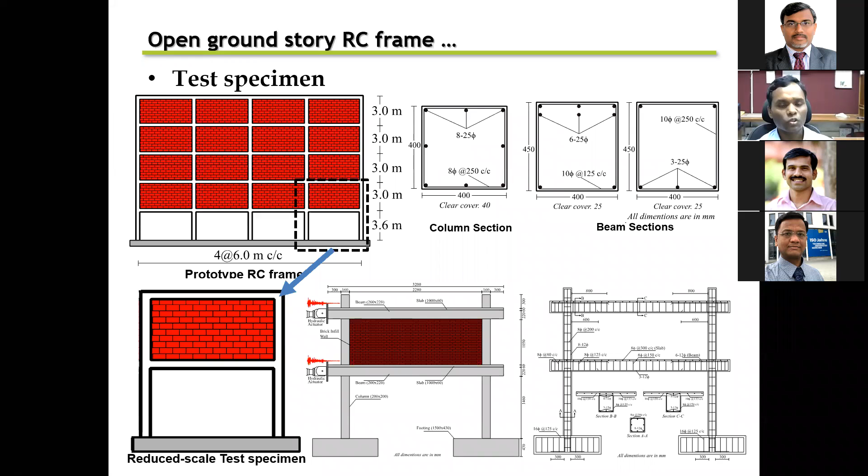Just to end this, I'll show an example application of how these passive devices can be used in retrofitting concrete structures. This is an open ground story structure, taken as a 2-story structure. You can see the 2-story structure here with the beams and columns, filled with infill walls.

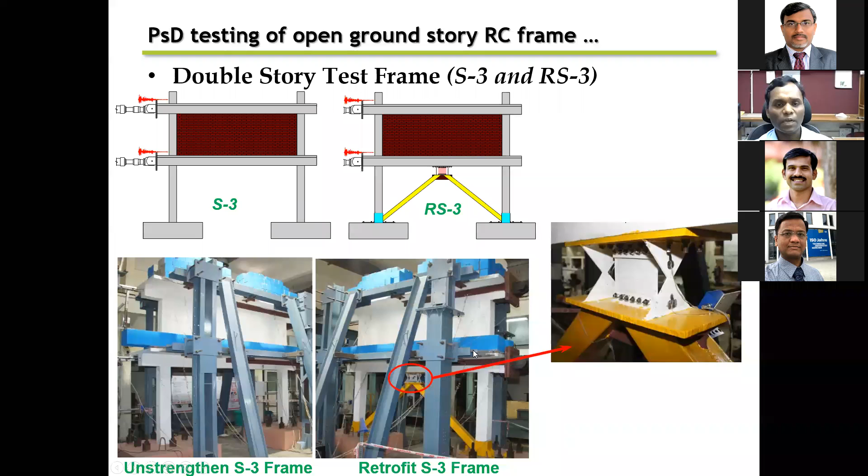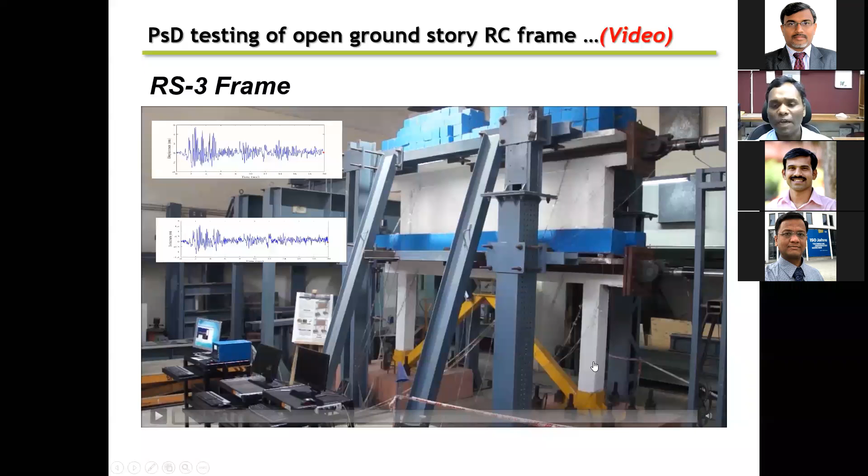There's very minor damage there. Then we wanted to see what happens. So this is how the earthquake response is. Then finally we wanted to see, if it needs to be collapsed, how it will look like, just to

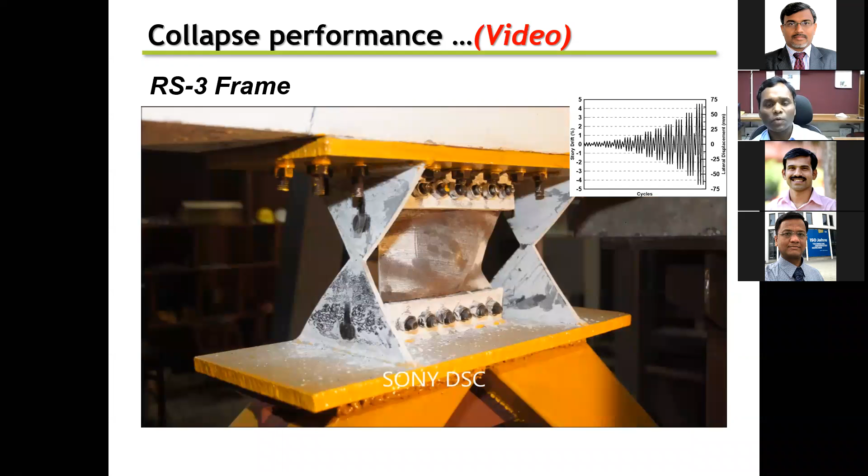show how the entire system works. You can see it's not steel, it's a concrete building, and you can see how wide the loops are, like the steel buildings. So even in the soft story buildings, which are very, very predominant in our country, you can see that this can be used as one of the best effective tools to increase the energy dissipation.

And that is how the link behaves in the same system. They provide the energy, they provide the damping, provide the strength, they provide the ductility, and it can be used as one of the effective retrofitting techniques in practice.

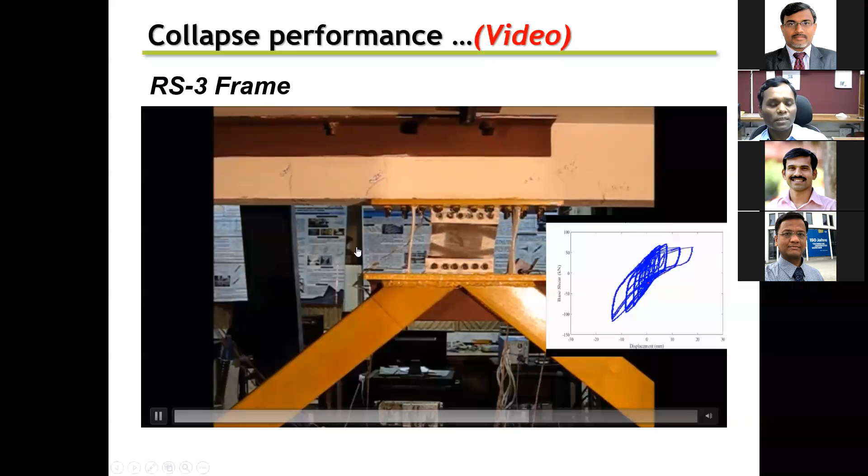Okay, I think this is my last slide. Thank you so much, I took a little longer. Do you have any questions? Just to summarize this, we have already explained. If you have any questions, you can tell me.